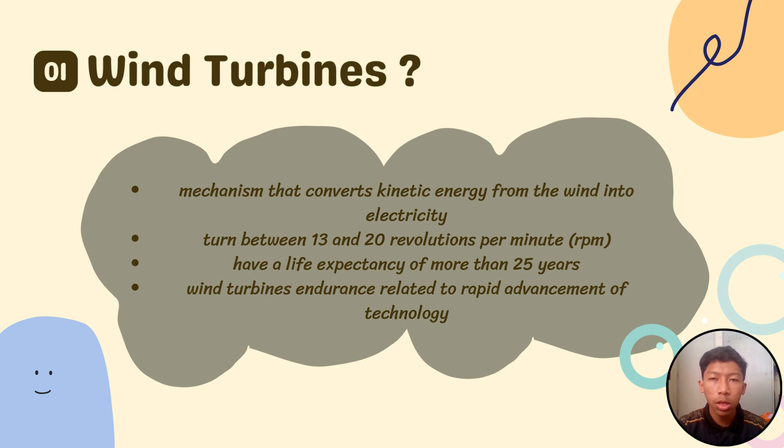For information, one wind turbine has a life expectancy of more than 25 years. As a result, the government can save on financial costs and budget for changing the wind turbine every 5 years, for example. As we know, our current era is getting more advanced with technological and digital progress, so the endurance of wind turbines also depends on technological advances, which is why our wind turbines today are more durable than in the past.

Why is the wind turbine important? We may not even know the reason for the importance of wind turbines in our country, but I will explain. First, it is important for employment. With the existence of the wind turbine industry, it provides a large opportunity to employ people.

For example, if the wind turbine industry is expanded in Malaysia, the government can hire Malaysians who are still unemployed or are still looking for jobs. Besides that, wind turbines can also create many long-term job opportunities that require many workers in various departments in the industry. Without realizing it, this good effort regards the future of young people.

If the wind turbine industry expands in Malaysia, it can help the country improve its economy in the long run as well. In today's unstable economic situation in Malaysia, this recommendation is very important to restabilize the country's financial system. According to an analysis by the Global Wind Energy Council in 2019, the wind power industry can deliver more than 3 million new jobs over the next 5 years.

Second, wind turbines are a long-term solution. Wind turbines are said to be a long-term solution in supplying electricity because wind resources are not limited and will remain as long as the world continues to rotate. Unlike fuel and gas, both of these will run out one day if the management of the energy resource is not carried out well and wisely.

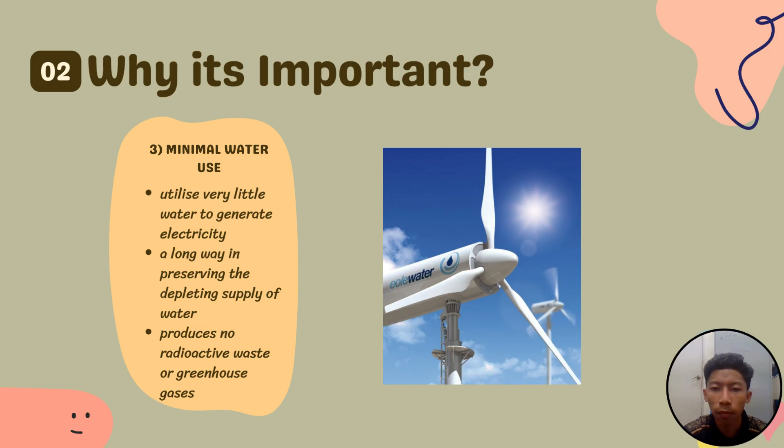Assalamualaikum, my name is Muhammad Aiman Hakim and I will be talking about the scientific explanation of wind turbines. Firstly, I will explain the process when wind hits the turbine blade.

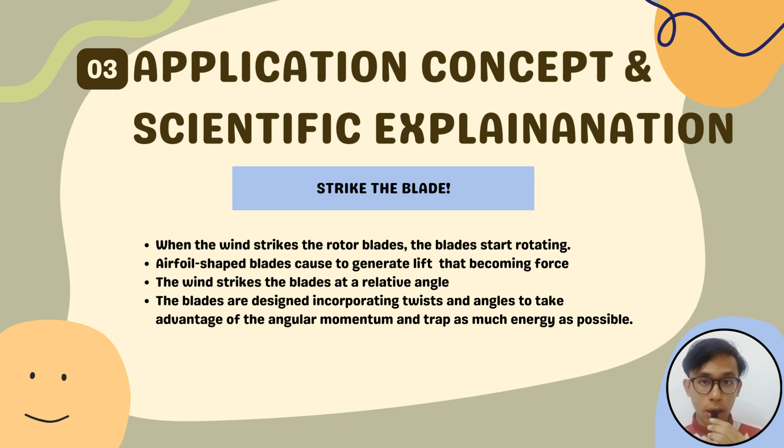When the wind strikes the rotor blades, the blades start rotating. Airfoil-shaped blades generate lift, which becomes the force that produces electricity. However, the wind strikes the blade at a relative angle. Hence, the blades are designed incorporating twists and angles to take advantage of the angular momentum and trap as much of the energy as possible.

Then the speed of the input must be amplified. The turbine rotor blade is connected to a high-speed gearbox, which amplifies the rotor rotation to a high speed. This high-speed shaft from the gearbox is coupled with the rotor of the generator, causing the electrical generator to run at a higher speed.

An exciter is used to give the required excitation to the magnetic coil of the generator field system so that it can generate the required electricity. The produced voltage at the output terminal of the alternator increases when the speed and field flux of the alternator increase.

Lastly, how to control non-uniform wind speed that hits the turbine: excitation must be controlled according to the availability of natural wind power to maintain the uniformity of the output power from the electrical generator or alternator. A turbine controller that detects wind speed regulates the exciter current.

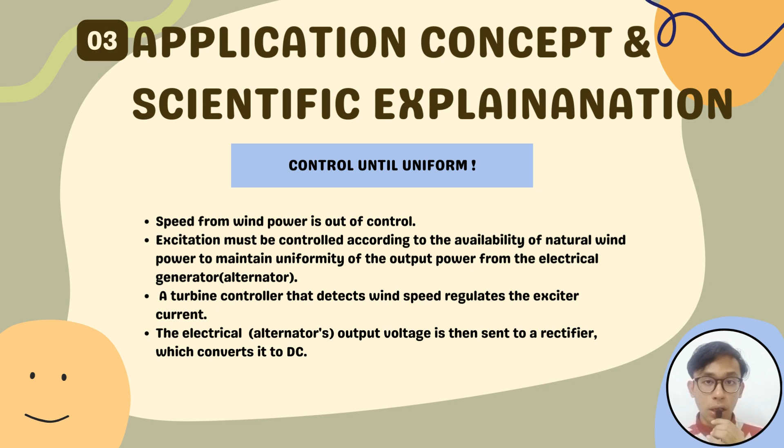The electrical generator's output voltage is sent to a rectifier which converts it to DC voltage. After being rectified, the DC output is delivered to a line converter unit which uses a step-up transformer to change it into a stabilized AC output that is then fed to the transmission grid or electrical transmission network.

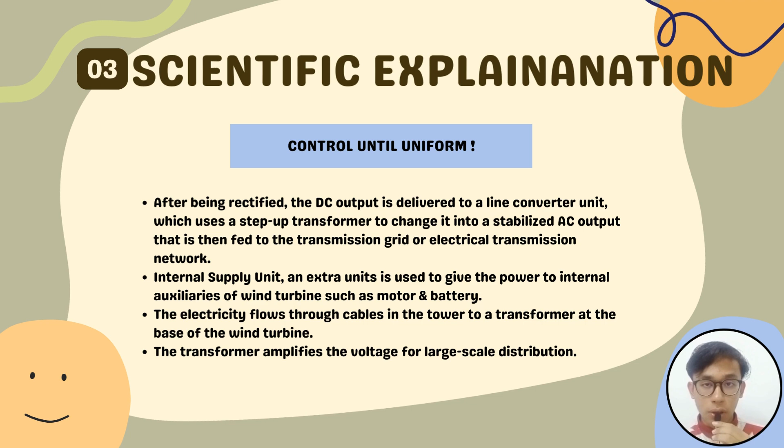The internal supply unit gives power to internal auxiliaries of the wind turbine like motor and battery. The electricity flows through cables in the tower to a transformer at the base of the wind turbine, which amplifies the voltage for large-scale distribution.

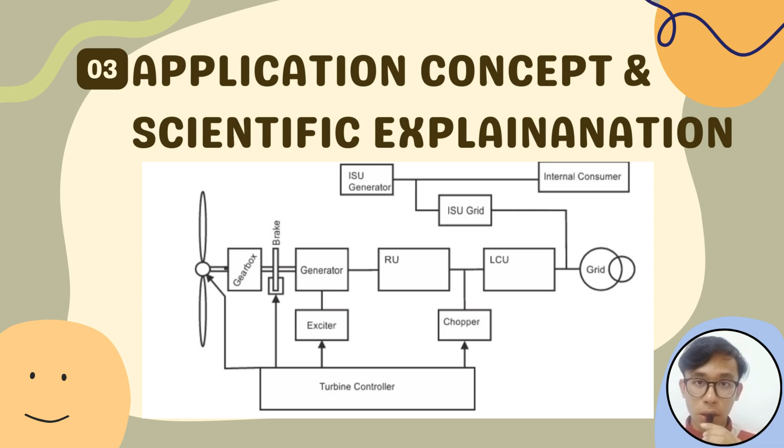The first thing are the blades and the rotor. When the wind blows over them, the blades lift and rotate, causing the rotor to spin. The function of a rotor blade is to capture the kinetic energy of the wind and convert it into rotational energy. The design of the blades maximizes the amount of energy captured while minimizing drag and turbulence. The material used in the construction of rotor blades offers a combination of strength, stiffness, and low weight, while the rotor is made of a combination of the hub and the blades.

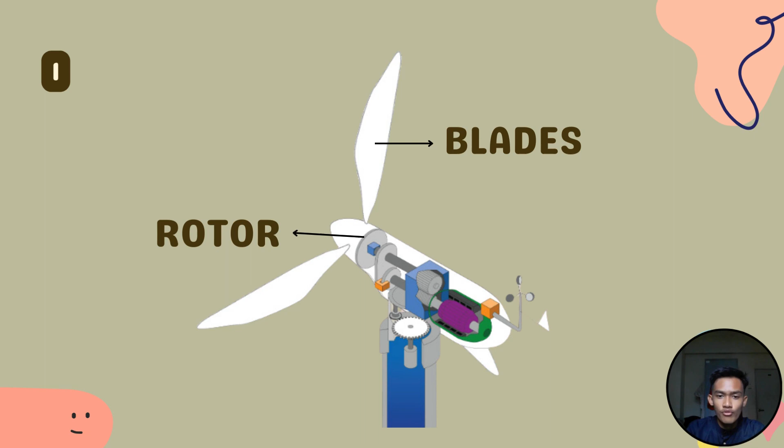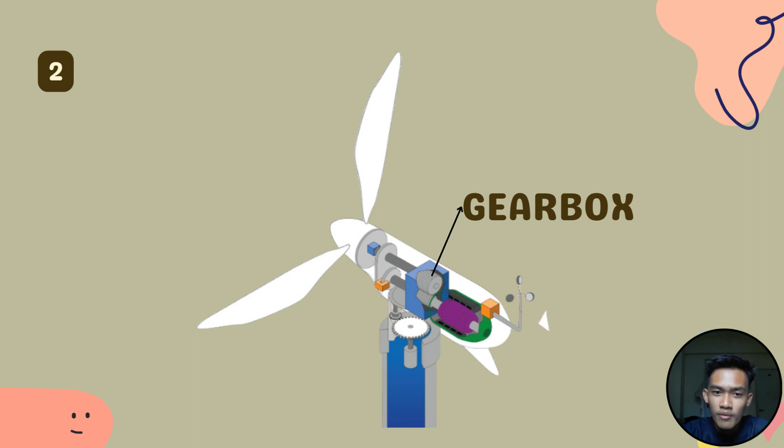Secondly is the gearbox. The gearbox increases the rotational speed of the turbine's rotor to drive the generator at the required speed, since that rotational speed is required by most generators to produce electricity.

Thirdly is the generator. The function of the generator of wind turbines is converting the rotational energy into electrical energy. Fourth is the high speed shaft and low speed shaft.

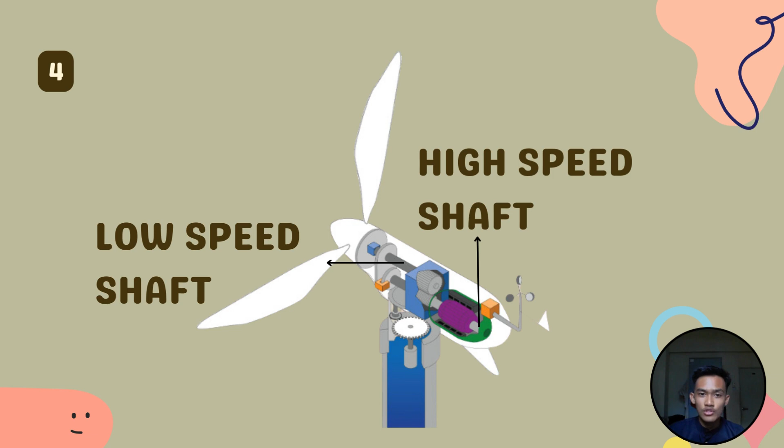The high speed shaft's function is to drive the generator. Within the generator, there is an armature, which is a coil of copper that is connected to the high speed shaft. The low speed shaft's function is that the rotor turns it at about 30 to 60 RPM, and it is connected directly to the rotor of the wind turbine. The difference between the high speed shaft and the low speed shaft is that the low speed shaft revolves considerably more slowly than the high speed shaft.

Next is the anemometer. In the anemometer, the wind speed is measured and the wind speed data is transmitted to the controller. Next is the controller.

The function of the controller in the wind turbine is to control the wind turbine so it does not operate if winds are above roughly 55 miles per hour, which is the same as 88.51 km per hour, because of the risk of damage that will happen.

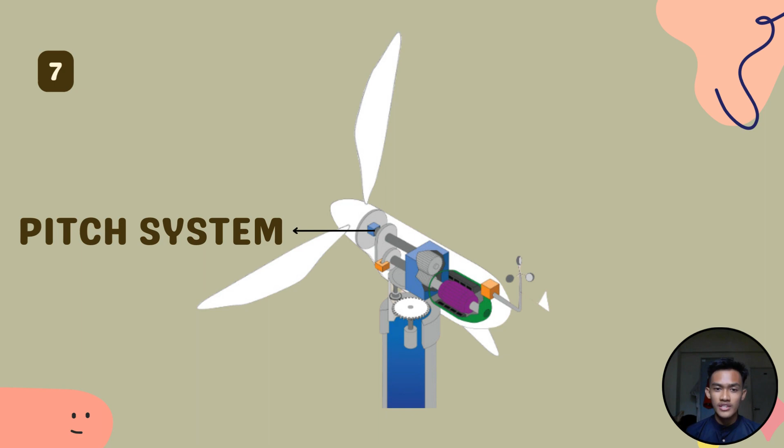Other than that, we have the pitch system. Its function is to prevent the rotor from turning in winds that are too high or too low to generate electricity, by turning the blades away from the wind.

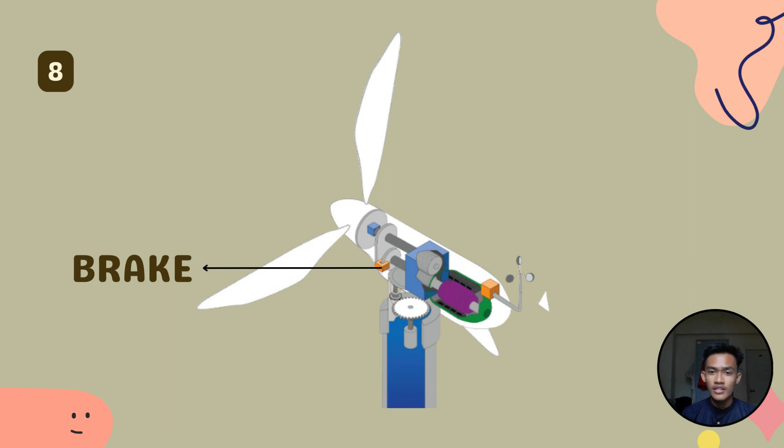Next is the brake. The rotor will be stopped mechanically, electrically, or hydraulically in emergencies by the brake of the wind turbine.

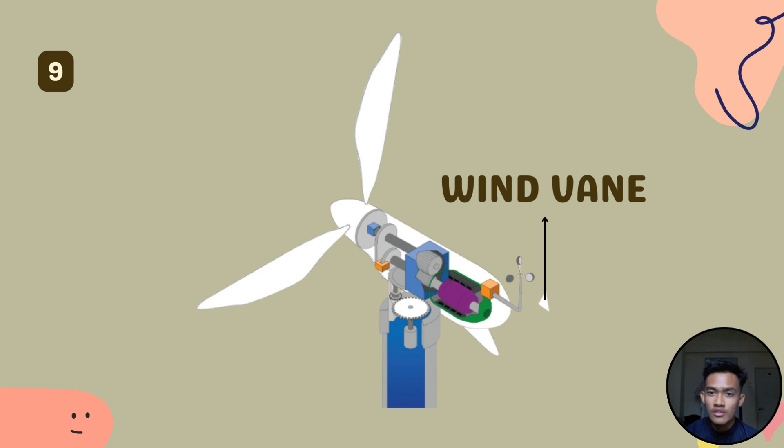Next is the wind vane. What happens in the wind vane is it measures wind direction and communicates with the yaw drive to orient the turbine properly with respect to the wind.

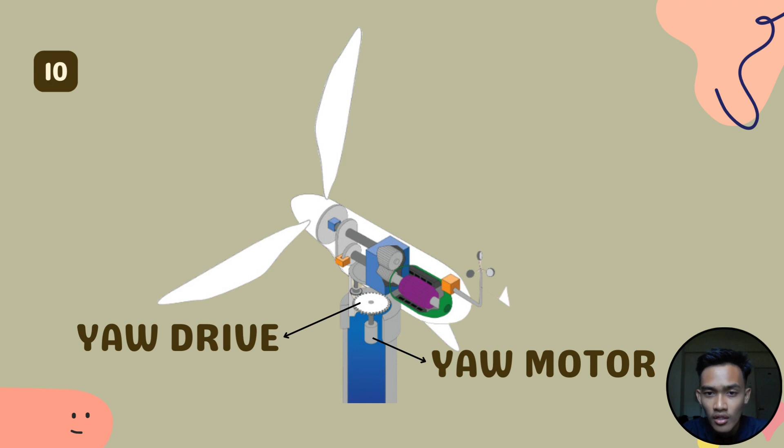Next, we have yaw drive and yaw motor. The function of the yaw drive is to maintain the rotor facing the wind when its direction shifts, while the yaw motor is to power the yaw drive.

Last but not least, the important part of the wind turbine is the tower. Wind speed increases with height. Taller towers enable turbines to capture more energy and generate more electricity, and that's why the tower functions to support the structure of the turbine.

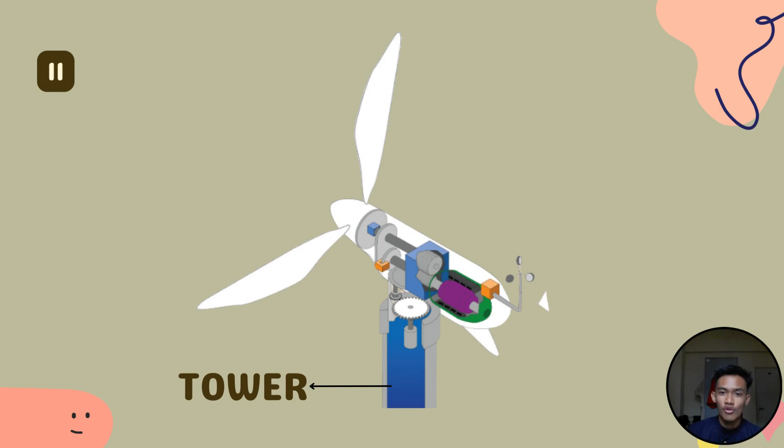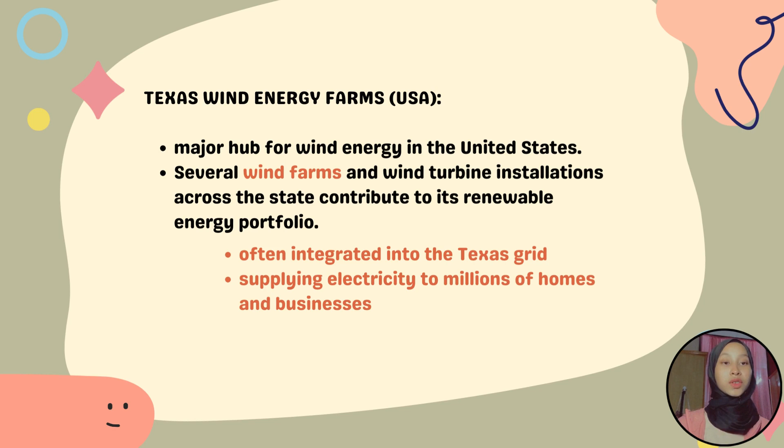Firstly, we have Texas Wind Energy Farms, USA. Texas is a major hub for wind energy in the United States. Several wind farms and wind turbine installations across the state contribute to its renewable energy portfolio. These wind farms are often integrated into the Texas grid, supplying electricity to millions of homes and businesses in the state.

Secondly, we have Horns Rev 2 offshore wind farm, Denmark. Horns Rev 2 is an offshore wind farm located in the North Sea off the coast of Denmark. The project features a cluster of wind turbines that generate electricity from the strong North Sea winds. The energy is transported to the mainland through undersea cables and integrated into the Danish grid, providing power to Danish households.

Lastly, we have Gansu Wind Farm, China. The Gansu Wind Farm is one of the largest wind energy projects in the world, located in the Gansu province of China. It incorporates thousands of wind turbines across a vast area, both onshore and in the Gobi Desert. The energy generated is transmitted to various parts of China through an extensive transmission network, contributing significantly to China's renewable energy capacity.

Next, I will continue with the advantages of wind turbines. First, wind turbines are cost effective. This is because wind turbines are becoming more cost competitive for electricity generation compared to traditional fossil fuel based ones. Electricity generation using fossil fuels is more expensive than using existing wind turbines.

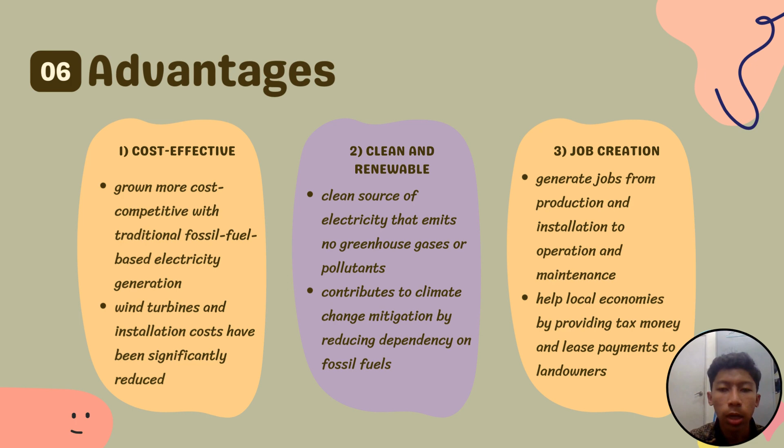The wind turbine industry can also generate jobs for production and installation to operation and maintenance. The job that will be offered involve various departments with different functions and tasks. All the scope of work from the factory to the installation of the wind turbine will cause the industry to open many job opportunities. If the wind turbine industry wants to be implemented, it needs a large area of land. Therefore, this industry can help the local economy by providing tax money and lease payment to landowners.

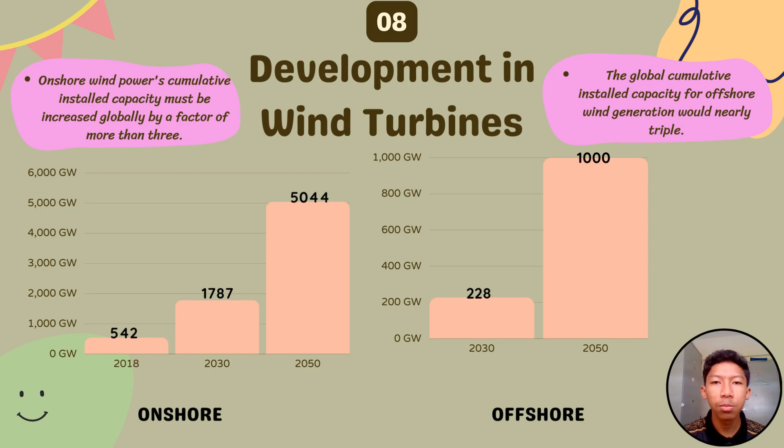There are some innovations that can be implemented to enhance the wind turbine. Firstly, build taller towers for wind turbines. Higher hub heights have stronger winds, so longer blades require more clearance to reach those high altitude winds. Next, inventing climbing cranes that facilitate more effective turbine installation and major component replacement. It is more cost effective than conventional cranes.

Lastly, use wake steering technology. It is a controller that tilts or turns the direction of the wind turbine face and modifies generator speed. Usage of this technology will allow existing facilities to gain 1 until 2% in annual energy production.

In conclusion, wind energy is very effective in this era of digitalization and modernization in maintaining the well-being of green Earth. If the production of electricity is still dependent on fossil fuel, it will cause harm and will run out of energy because fossil fuel is non-renewable energy.

In addition, wind energy has many positive effects in the advancement of industry and technology, as well as the well-being of the earth. This is because with the advancement of industry and technology in wind turbines, this matter can be used as a career.